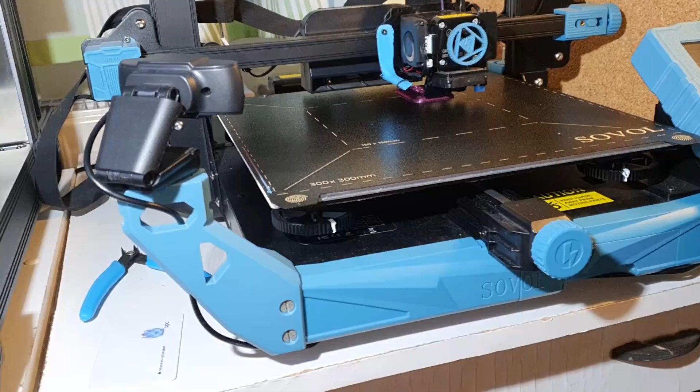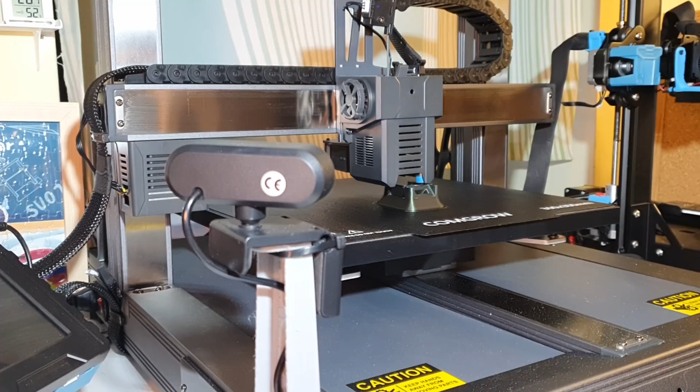I certainly was, but to my delight, I discovered how simple it was to activate this feature with just a few commands and a pair of basic random $5 webcams. Both my Sovol SV07 Plus and Klipperized SV06 Plus now boast this cool functionality. Stick around and I'll show you how I did it and how you can elevate time lapses on your Comgrow T300 or other Klipper printers, even if not all features are enabled initially.

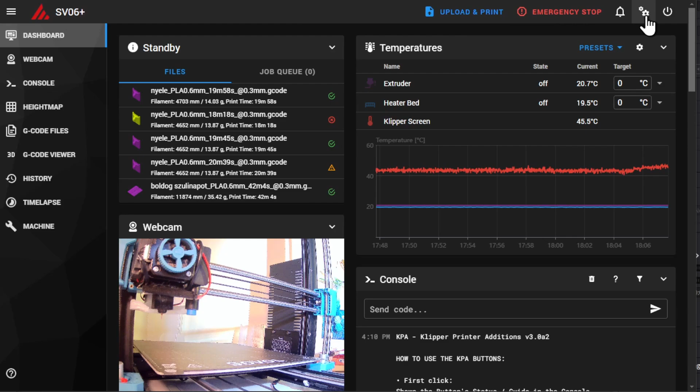Take a look at my SV06 Plus with the Sovol Klipper screen, now featuring the time-lapse setting in the mainsail interface. Not only can I create hyperlapses, these sped-up recordings of prints, which are not ideal for bed slingers, but with a few clever slicer settings, we can capture snapshots at layer changes and even park the print head out of sight.

All your prints can be automatically recorded and found listed here under the new time-lapse menu item.

So in this video, I'll show you how to add and configure a webcam. I'll recommend camera mount options for these printers. Then I'll guide you through the installation process for the Moonraker time-lapse plugin in the official Sovol Klipper screen without bricking your printer. We'll configure both your slicer and Klipper in the mainsail interface. And stick around to the end because as a bonus tip, I'll show you how to salvage a broken time-lapse using free software. So let's get right into it.

Starting with the good news. Almost any webcam, even the ones you can get for less than $10 on AliExpress, will work with your printer. I'll have a few listed for you in the description below.

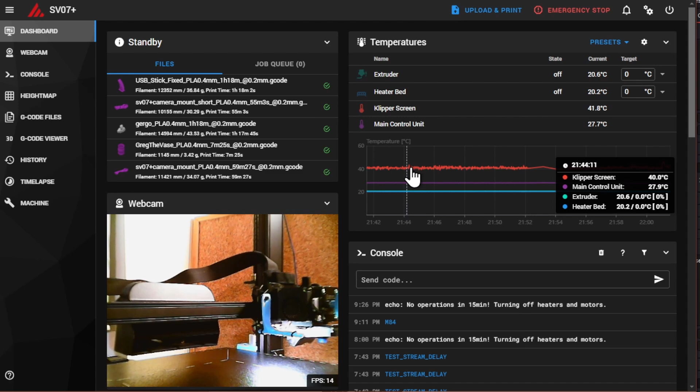Just plug it into one of the USB ports of the printer, bring up the mainsail interface in your web browser or Orca Slicer, and add the camera under the camera section of settings. You can name the camera anything you want, and unless the picture is upside down or anything, you can keep the default settings. You might need to restart or reboot the printer or unplug, replug the USB cable, but eventually the camera feed will show up on your dashboard and on this dedicated camera page.

Cheap webcams like these are sufficient for remote monitoring your prints and for checking the state of your printer from a remote computer before starting a print job.

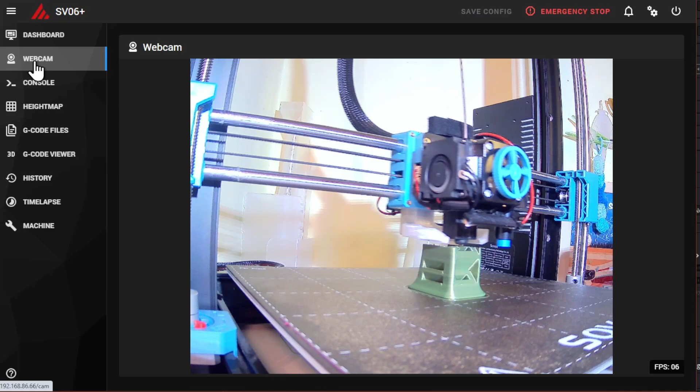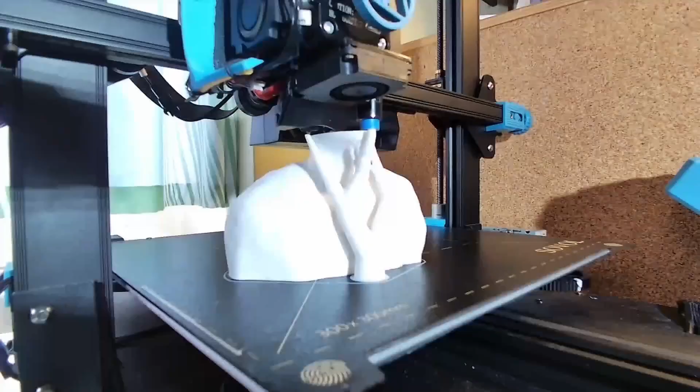But I promised time-lapse videos. For those, you probably want to invest into something higher quality. Just compare the footage from my $60 Lenovo 510 and the $7 HD webcam from AliExpress.

Though there are a few settings you can tweak to up the quality of either of these. On the machine page, you can download crowsnest.log. And if you scroll to the end, you'll see a list of resolutions your camera is capable of. See, even this potato is capable of producing 1920 by 1080 resolution.

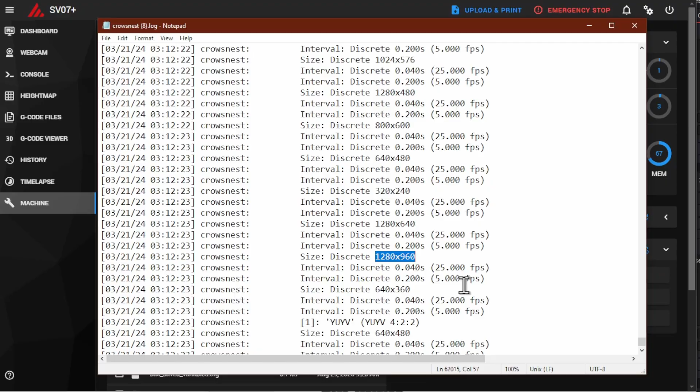While I'm not going that high, let's try this 1280 by 960. Why not the 720? Because 720 just crops out the top and bottom of the picture. You will get a taller view angle with more boxy aspect ratios.

Now we'll make a backup of the crowsnest.conf file by duplicating it and adding the current timestamp. Watch my earlier video on recovering configuration file backups in case of any mistakes. We could edit the file right here, but you can also access it directly from the camera settings page.

See? So here, we can update the resolution. Just be sure to type a lowercase x and no spaces between the numbers. Cheap webcams might just upscale their crappy picture, but this is a crucial setting for higher-end cameras.

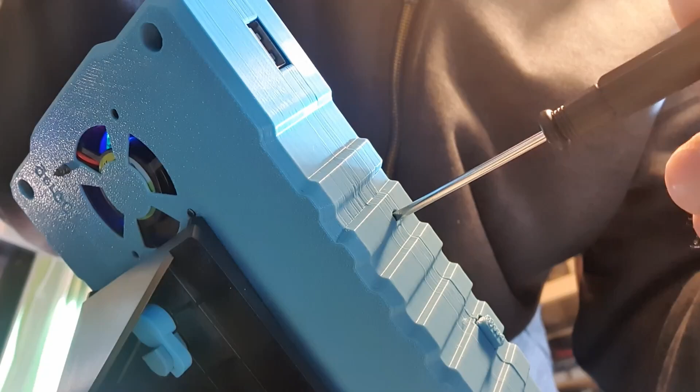Just don't go too crazy with the resolution because you can really bog down your Klipper screen with a lot of image processing. You will need to rev up that cooling I showed you how to add to your Klipper screen. Another must-see video. On to mounting options.

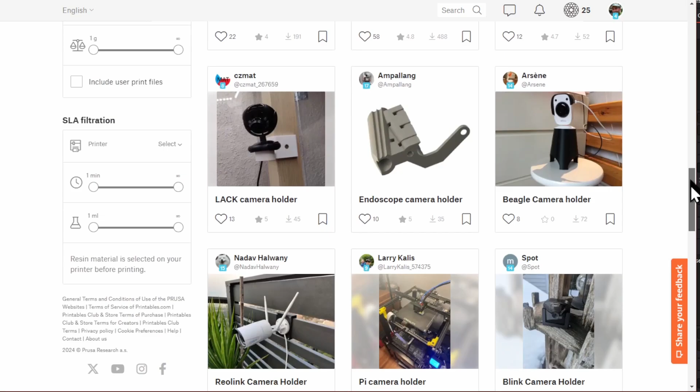It's of course endless, from clipping the cam to the side of your rack to off-the-shelf tripods, and you'll also find an infinite number of 3D printable camera holders.

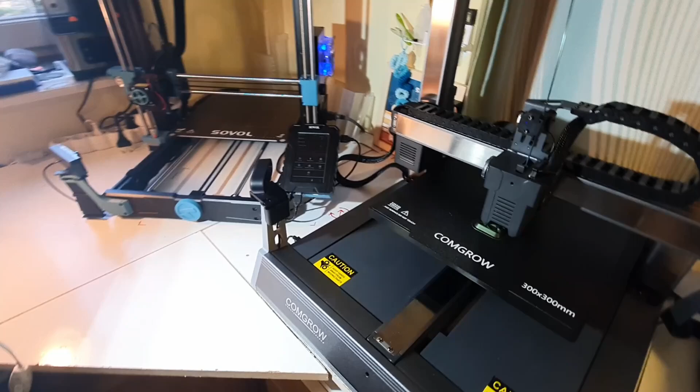Personally, I love the simplicity of 3D Print Demon's fixed USB camera mount for the Comgrow T300, which ingeniously replaces the left side cover of the front panel.

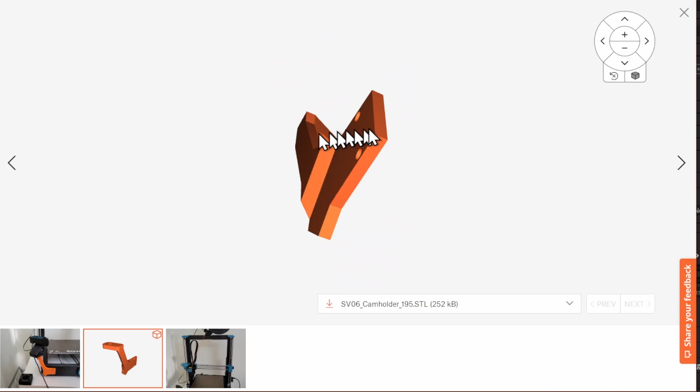I loved it so much that I looked for a similar solution for my other two printers. This camera holder for the SV06 Plus from Vasco Almeida looked promising, but it turned out to be a nightmare to print and ended up not even fitting correctly on my printer. I basically had to redesign it from scratch for a much better fit, and I also made it printable without supports. So much easier. You will find my improved model in my Cults 3D collection.

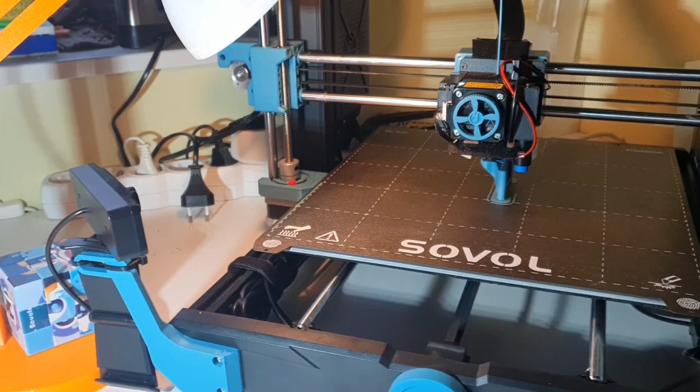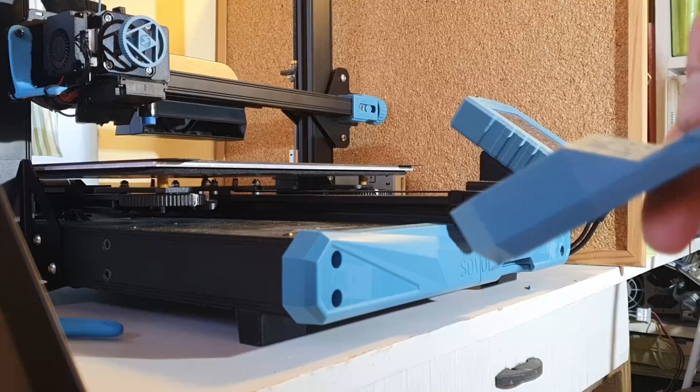Designing the camera holder for the SV07 Plus was a bit more challenging because unlike the SV06, the SV07 parts aren't open source yet. Along with the tall and short variants, I printed a number of prototypes this time again to make sure it fits perfectly to the front cover and blends well with the design of the printer.

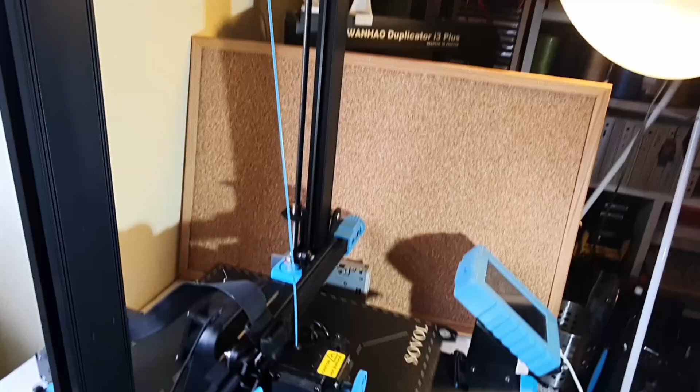The complete holder takes about an hour to print using just 30 grams of filament, and for durability I suggest using a gyroid infill and at least 3 walls.

But besides the models, I also included my recommended slicer settings in the Cults 3D project, linked up here and in the description below.

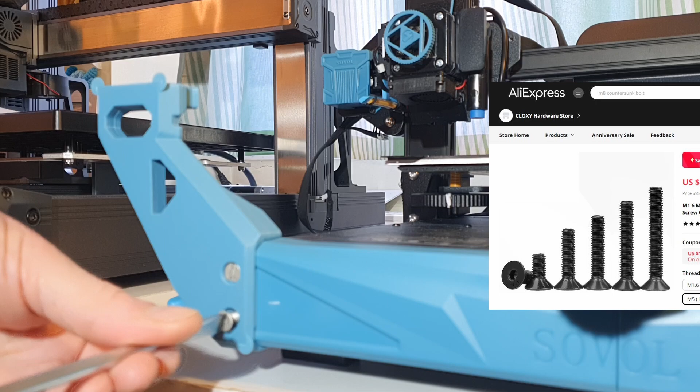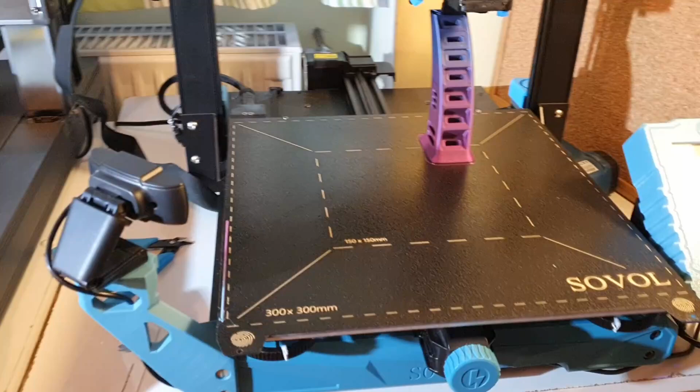You'll also need a pair of 30mm long countersunk M5 screws because the originals would not be long enough. I included a cable channel, zip tie grooves, and a 7mm mounting hole to attach your camera, but feel free to comment your wishes below. I'd be happy to add more camera mounting options.

And that's all for the hardware. At this point, you're already set for remote monitoring. But we are here for more, right?

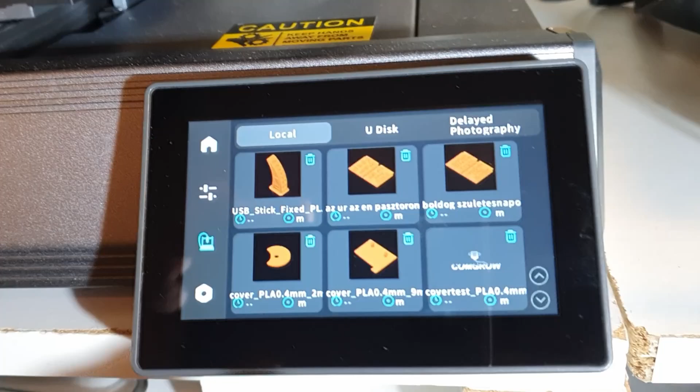The Moonraker time-lapse plugin. And here's the good news for Comgrow T300 users: it's already installed on your machine. While its configuration isn't perfect, and we are going to address that shortly, you have the luxury of skipping this step with the installation process.

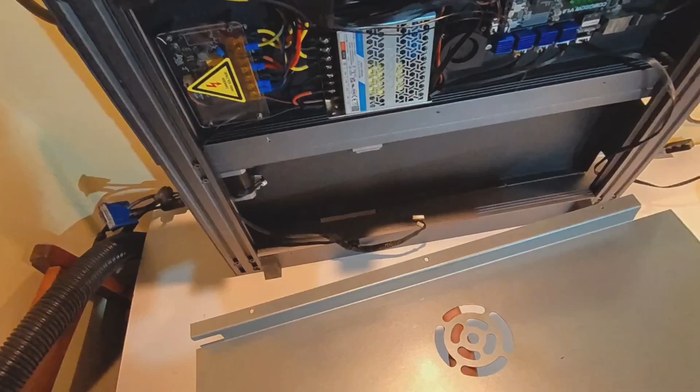And this is a big relief, believe me, since accessing the eMMC for making a backup of it on the T300 would have been a real pain. So, T300 users, you can sit back and just watch the steps that Comgrow has conveniently spared you from.

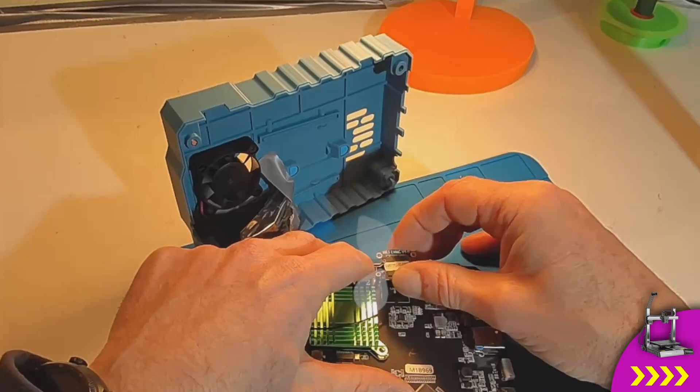On the Sovols, step 1, back up your eMMC. Seriously. You'll see we are going to install stuff inside the Klipper installation, not just modify config files like printer CFG. If you mess up, you will be out of your printer.

And it is easy to mess up, but it's also very easy to make a backup. I made a video about it. Do watch it, and do it before proceeding. Even if it means you need to wait a week for that eMMC reader to be shipped to you before you can make your first time-lapse, don't risk bricking without an easy way back.

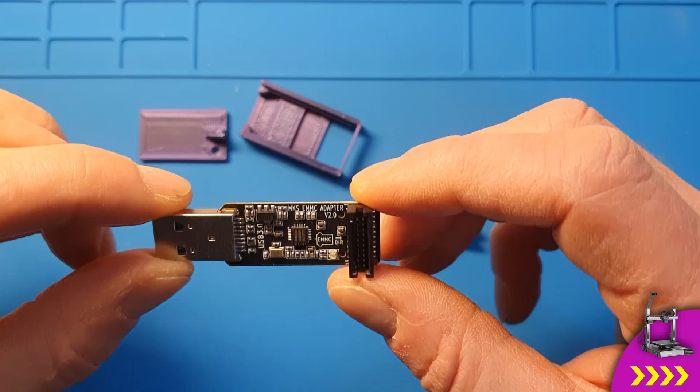So, if you already have your backup, the process is pretty straightforward from here. We'll just follow the steps on their GitHub detailed in the installation.md page. On our remote computer, we open a command prompt. I'm doing it on a Windows installation here.

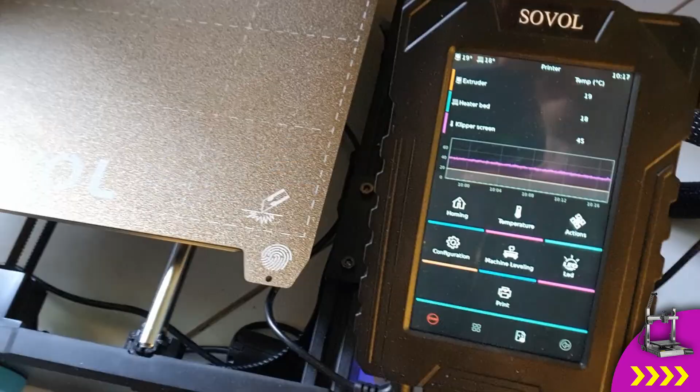We are going to log into the printer using SSH with the username MKS and we put the IP address of our printer here, the same that we use in our web browser or Orca Slicer, found under config network in the Klipper screen. We can't see any characters on the screen as we type the password, which is MakerBase, and press enter.

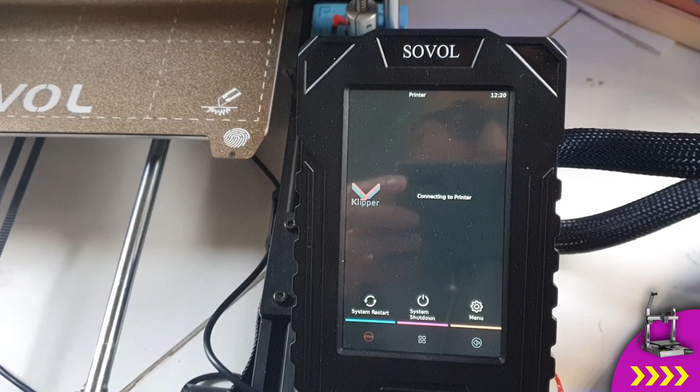And this is how it went down on my SV06 Plus Klipper screen. It took almost exactly 4 minutes. It also showed this message on the Klipper screen and rebooted once or twice. Although I got a few warning messages along the way, the greeting 'Happy printing' gives us hope.

On my identical looking SV07 Plus installation, running the same commands resulted in error 100. A bit disappointing, but I did find a fix. Hardcore Linux Klipper experts will probably cringe, but this is what I did.

For starters, I made sure I had a recent eMMC backup of my Klipper screen. Yeah, I know I already told you to make one, but the chance of bricking your SV07 Plus at this point has just multiplied. Then, I simply disabled the part of the install script where it attempted to update Klipper and Moonraker to the latest versions, because the error messages I saw seemed to be referring to those.

I've seen walkthrough guides on updating them to the latest, and I might even do a video showing you how it can be done, but for now, the Moonraker timelapse plugin doesn't require these latest versions.

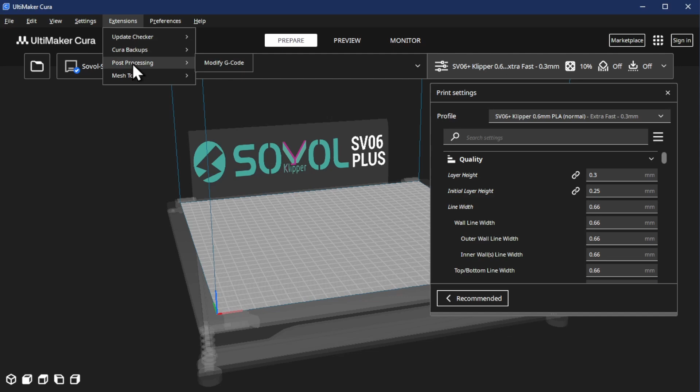In Cura, you will have to add a script under Extensions, Post-Processing, Modify G-Code, similar to the filament change or thumbnail images I showed you in my earlier videos. You can guess which script to select here. Yes, time-lapse. But change the trigger command to timelapse_take_frame, as the configuration guide tells us.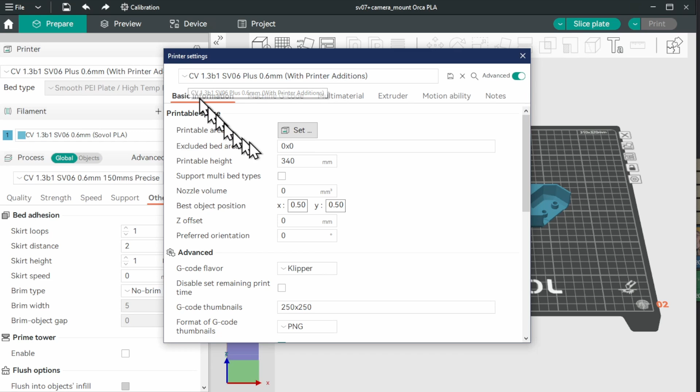But you know me, I recommend switching to Orca Slicer, and I made a whole video on why and how to do it. In Orca Slicer, we add the trigger command in the printer settings on the machine G-code page under this dedicated time-lapse G-code section. Our G-code generated by either slicer will now include this macro call following every layer change.

In the web interface of the printer, we now have a new settings group for time-lapse. We can enable or disable the time-lapse function, so you don't have to create the time-lapse for all your future prints. You will even see this same toggle when you start a print from the Mainsail interface or from the device screen of the T300. As far as I know, this option is not shown on the Sovol Klipper screen.

Next, we can choose the mode. Hyperlapse would actually work even without the layer change macro, but it produces terrible results on bed slingers, since the time-based snapshots will catch the print bed at different positions for every frame of the video, so layer macro mode is the one recommended. It's not perfect either, but layer change usually happens along one of the seam lines, which tend to be at the same bed position, at least for more simple prints.

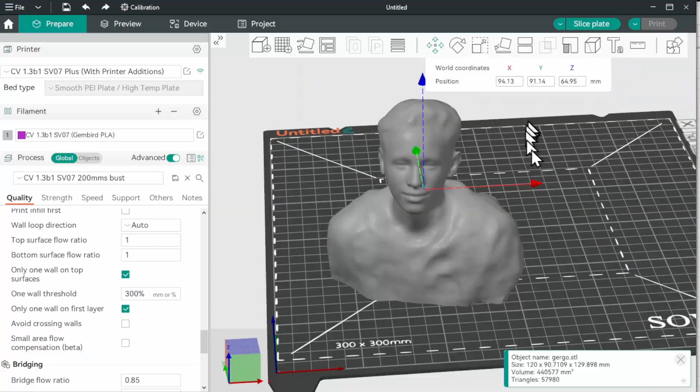In Orca Slicer, we can even use the seam painter to place the seam on an aesthetically advantageous part of the model, also considering the time-lapse ramifications of its position.

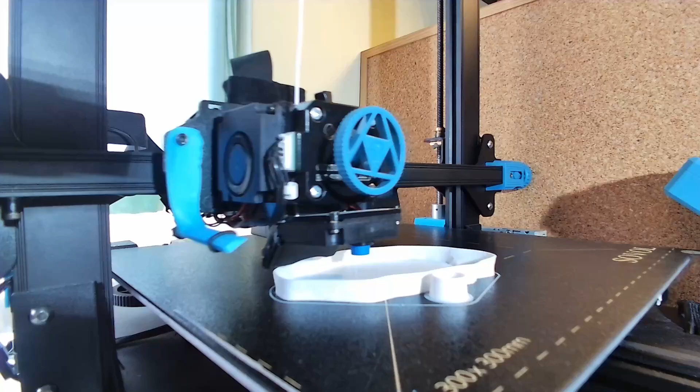For more complex prints, and if you want to take your time-lapse to the next level, we also have the option of moving the print head to the same position before taking each snapshot. You've seen the option Park Print Head in Cura, and it's also available in the settings here. Just make sure not to do both.

Three side notes here regarding print head parking. It looks amazing, but it will not only slow down your prints, it can also have quite a detrimental effect on print quality. It's not ideal to travel the extruder back and forth after every layer change.

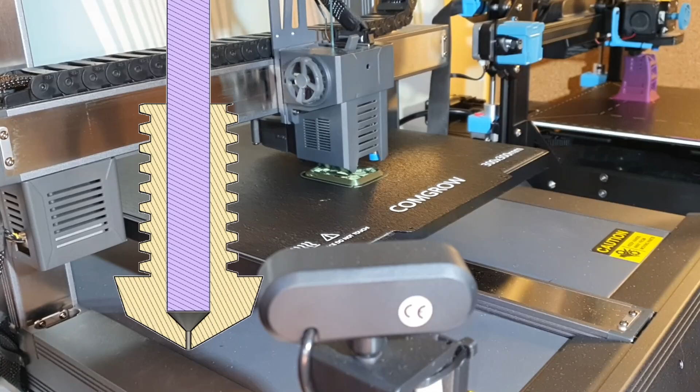Secondly, you see they let you add retraction before parking the print head. It indeed makes sense to retract the filament before parking and detract or refill the nozzle when resuming the print, but be careful. Most print profiles already have retract at layer change. If it does, make sure to disable this retraction before parking by putting 0 for both distance values. It's important, otherwise double retraction will pull the filament too far up in the nozzle, which can cause clogging and the failure of your print.

So, no double retractions. Thirdly, you'll notice the T300 has some of the options disabled, including printhead parking. Again, make a timestamped duplicate of your moonraker.conf file, then uncomment all the lines starting with the word park. Since so many things are already commented out, I'm also adding my name, so I'll know which ones I uncommented in this file.

After save and restart, you should be able to access these settings on your T300 as well.

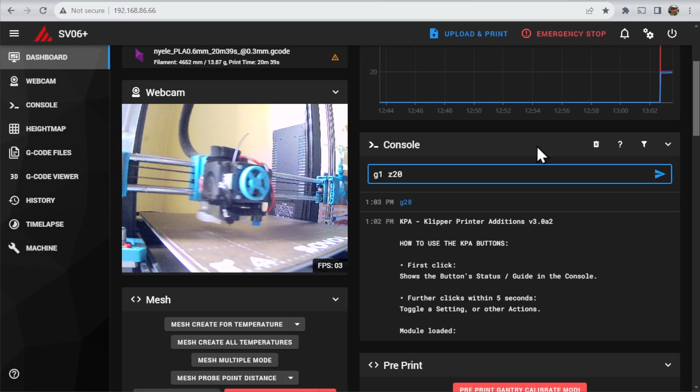The fourth note out of the three is regarding this option, stream delay compensation. Cheap webcams tend to lag, which would cause the wrong frame to be captured. With this option, we can attempt to account for this delay, but how do we know the value? They've provided a helper macro called test stream delay, which will simply move the toolhead along the x-axis from left to right, pausing in the center for the park time we've set in our settings and taking a picture with our set stream delay.

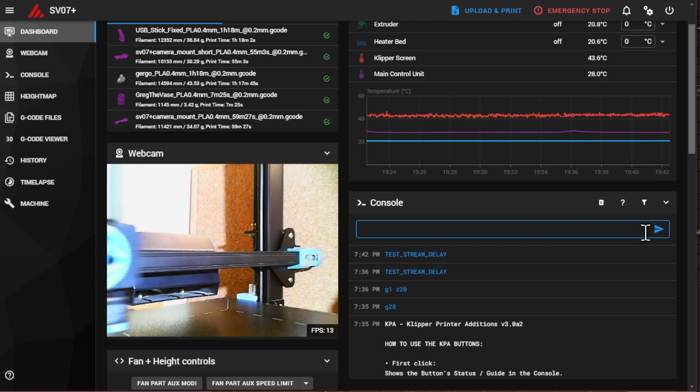We can check the taken frame on the time-lapse screen, and if the toolhead in the picture is to the right of the center, we know we have to increase the delay compensation value. If it is to the left, we decrease it.

When the picture is in the center and sharp, we have the correct value. Increase the park time to make it sharp. This method will not work too well if the delay of our particular webcam is inconsistent.

You can keep the rest of the settings as they are, all documented here on the plugin's GitHub page.

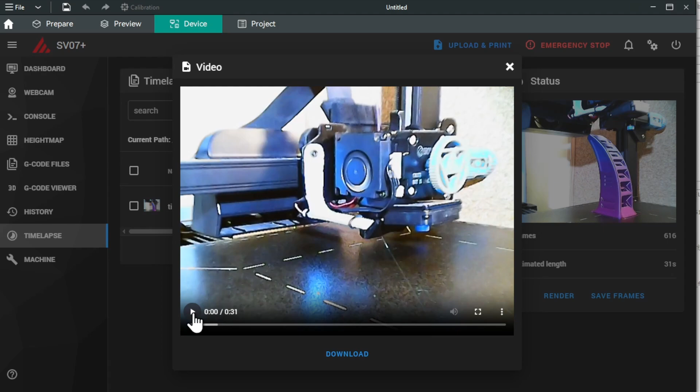You can watch the recording here, though it could look choppy depending on your network speeds and your choice of resolution. It's always better to download it and play it on your computer.

Again, I have 3 little notes for this. For one, you'll notice download only works from the web browser, not from the device tab in Orca Slicer. Two, these videos take up storage space on your printer - we've only got 2 gigabytes. Be sure to delete the ones you've already downloaded. And three, you can mark multiple to download, but remember it will need twice the space and it might take a few minutes to make the zip file. If you run out of space, just download and remove them one at a time.

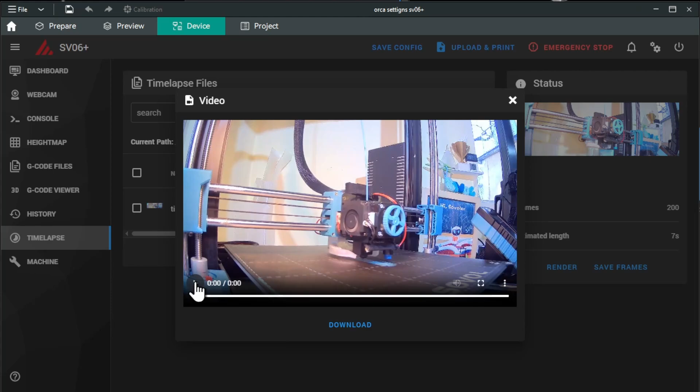And with this, we've arrived at my bonus tip, which is also related to this screen. What if your print completes and the video fails to render even when started manually? Well, it happened to me - my cheap camera was acting up. Turns out, even if just a single frame is corrupted, the whole render will fail. Very frustrating - it can be almost as devastating to lose a time-lapse as a failed print.

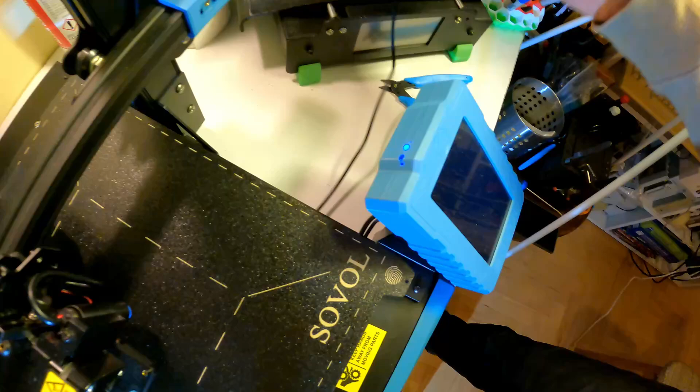You might need to redo that whole print in either case. Don't worry though, there is a good chance you can salvage the footage. First, if your camera flickers like this right from the beginning of the print, it's not too late to cancel and restart. I discovered plugging my camera into the side USB port fixed the flickering for me.

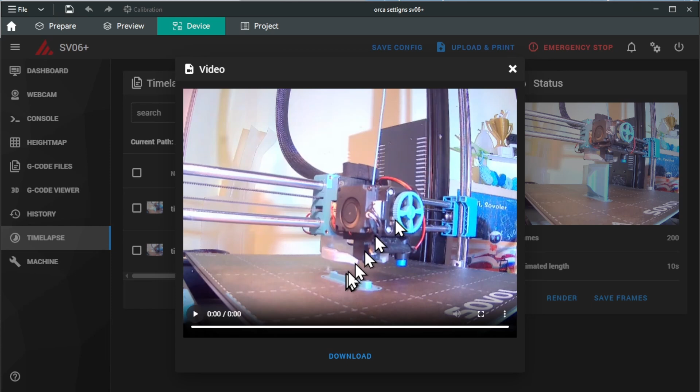Immediately after the failed recording, you can click Save Frames, then download the generated zip file in a web browser. Extract the frames to a folder on your computer. Weed out the corrupted frames either in thumbnail view or simply by sorting the frames by file size and deleting the smaller ones. Now make sure to resort them alphabetically, select all and rename. DaVinci Resolve wouldn't be able to handle the image sequence if the numbering is not continuous.

You can get DaVinci Resolve from the official website, and it's not just a trial version either. This is the video editor I'm using for my YouTube videos as well.

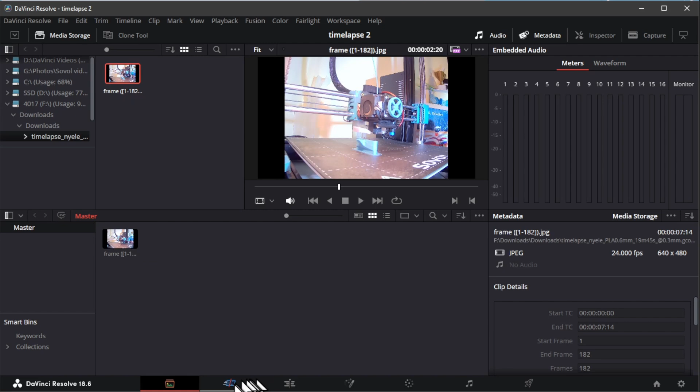In DaVinci, create a new project. Switch to the Media tab at the bottom, the very first one. In the overflow menu of the Media storage panel, set the frame display mode to Sequence, and drag and drop the folder containing the frames into the media storage. From here, drag them into your media pool. Switching to the Edit tab at the bottom, we drag the clip from the media pool onto the timeline.

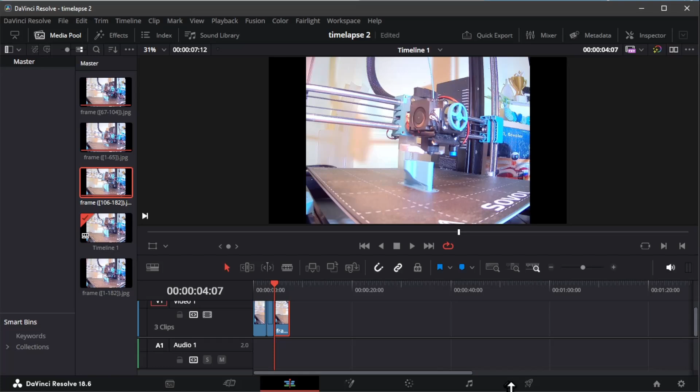You can already preview your video. If you still see some bad frames, you can go back and remove those frames from your folder and re-import them into DaVinci. But if you like what you see in the preview, you can go to the tab called Deliver at the bottom, select the YouTube option, set a destination file name and location, then add to render queue, and in the render queue panel, click render all. Not the simplest, but doable.

Amazing, isn't it? I was so excited when I realized this was all possible and not even that difficult. I'm sure you will manage.